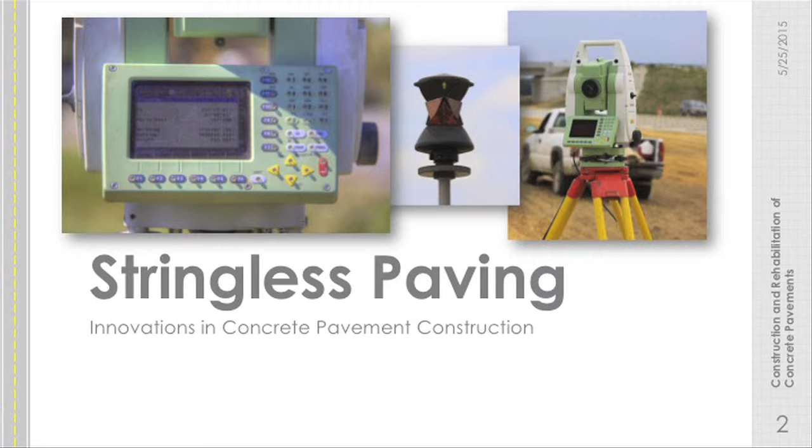Stringless paving. There's not been a lot in my decade in the industry that has really revolutionized things as much as this. It's changing the speed of construction. It's changing how the owners interact with the contractors. Because it used to be the case that the owners did everything behind the scenes and they would hand you a sheet of plans. The contractors had to decipher what that actually meant to then build things according to the designer's dream. Now, the owner does the design inside of a computer and then they give the contractor exactly what's going to be built. There's no more interpretation. It's more of a collaboration that's happening.

ACPA has a webinar on this topic of stringless paving as well. Again, that's another one that's free. Gives you a lot of the good information on this.

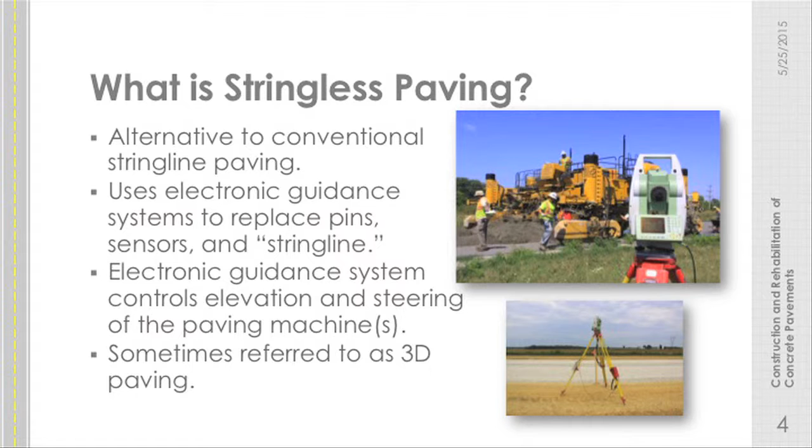So this is an alternative to our conventional stringline paving. We're using electronic guidance, things like GPS and lasers on site to replace the string lines. This does all of the steering and elevation control, every piece of it. So sometimes we refer to this as 3D paving.

There are a lot of benefits. It's much less labor intensive, reduces a lot of our prep time. The engineers that we have doing the surveying are harder and harder to find, so they cost more and more every year. This replaces them, not to make them redundant or obsolete, but there are still engineers and technicians necessary to work this equipment some.

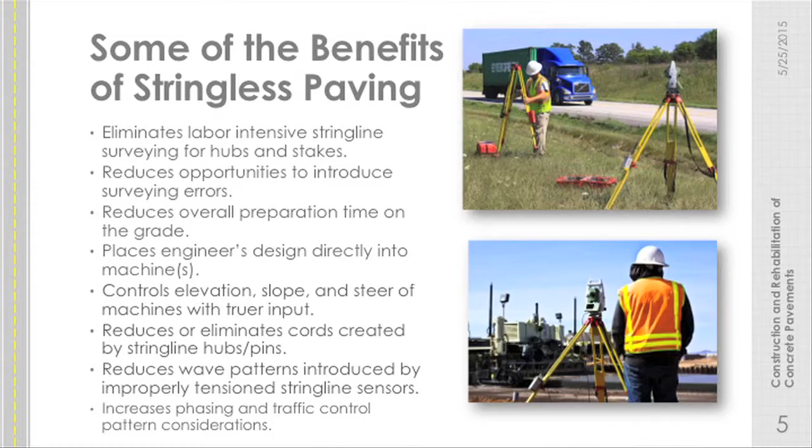But the engineer's design goes directly into the machines. There's less points of error possible because exactly what I drew in my CAD file is exactly what gets built. I don't have someone interpreting into a string line what that is and then have opportunities for errors from that point and then on to the paving equipment. So all of that work that I showed you earlier about the surveying and the hammering in of reference hubs and setting up the string line, all of that is gone.

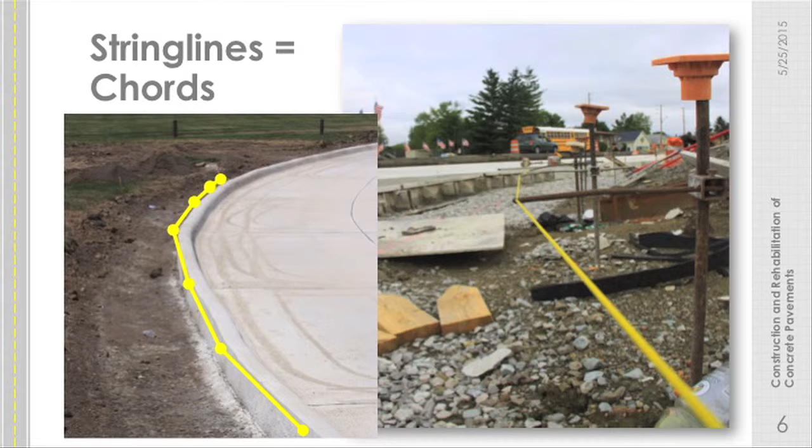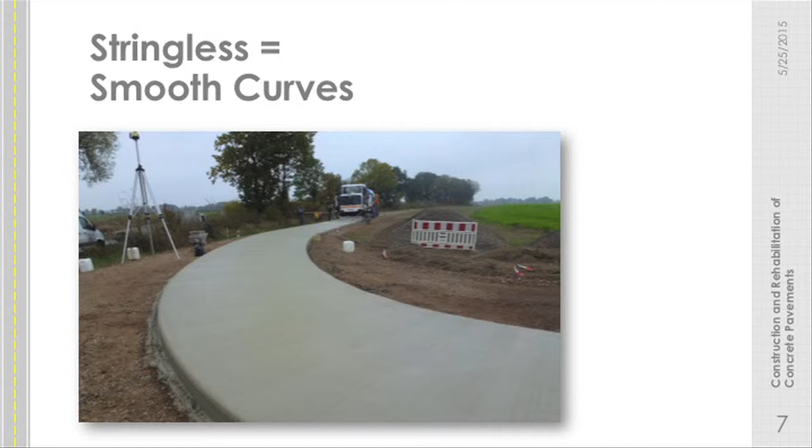Now, in conventional string lines, we have to have these straight chords or tangent sections as we go around curves. You can see that built into the side of the pavement. With stringless paving, it's perfectly smooth. It's the exact mathematical equation of that curve, both in the horizontal direction and vertically. So it's a much, much smoother end result.

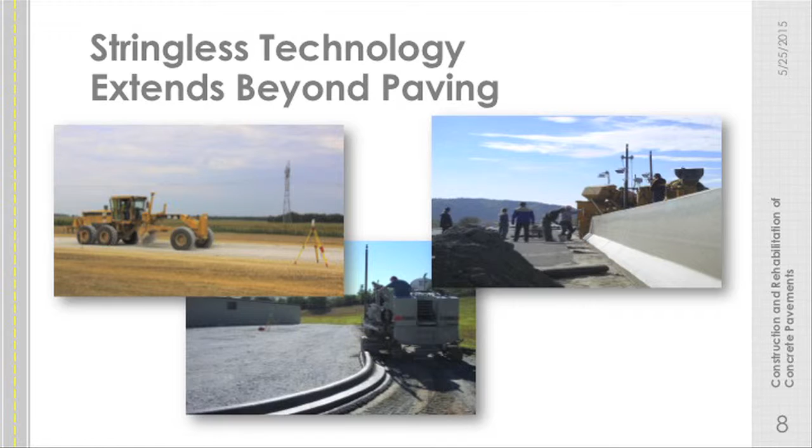Extends beyond paving. We use it for earthwork. We use it for barriers. We use it for curb and gutters. So any piece of roadway construction equipment at this point, we can use stringless paving on.

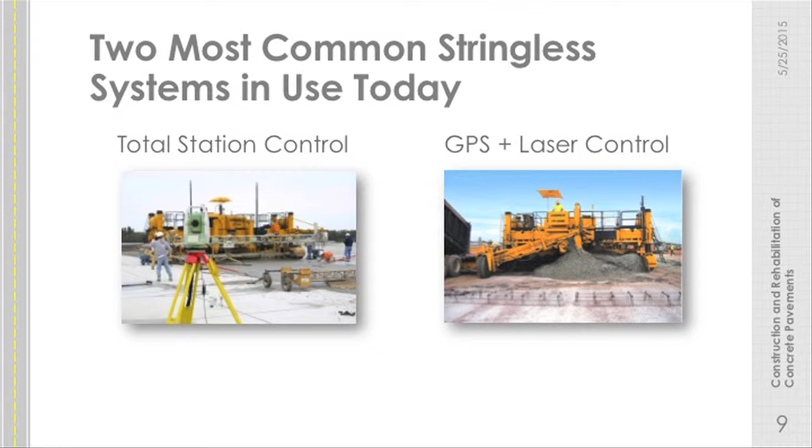Two most commonly used types, we're using total stations, robotic total stations. That's this piece of equipment you keep seeing. It's basically just a digital eye. Or we can use GPS and laser control. It's slightly less accurate. We use the GPS for X and Y, where we are on the Earth, but GPS isn't particularly good at telling you your elevation, not to the tolerance that we need for roadway building. So we have to augment that with lasers on the ground if we take that specific approach. But the total stations is the most common.

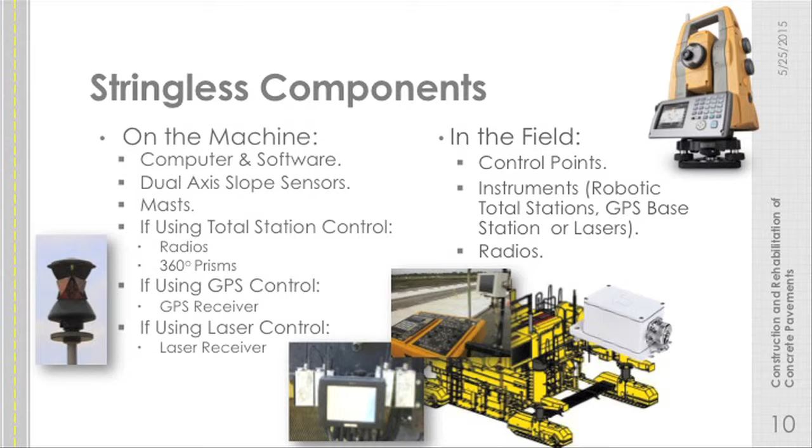So on the piece of equipment, we have a computer and software to run all of that. That's usually a small touchscreen panel placed right alongside the panel that the paving operator uses to control the vibrators and everything else. We have a dual axis slope sensor, which is just this little white box. It's no different than what you have in your cell phone that tells it, I'm tilting my phone this way or that. Same technology, just attached to a paver.

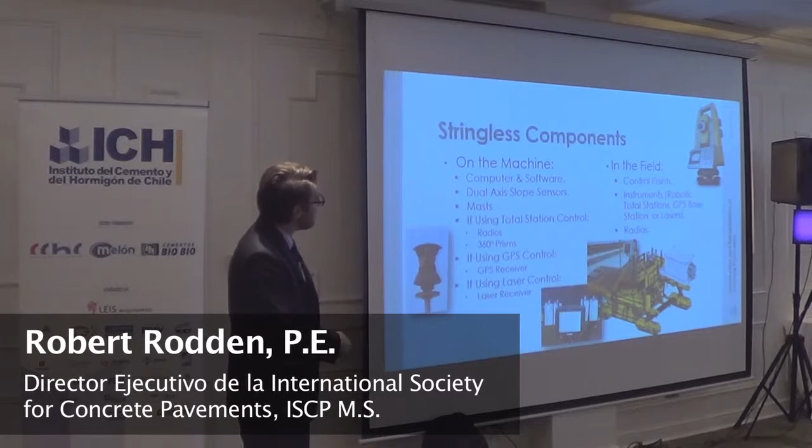We have masts, which are just poles sticking up into the air, that on top of them have these 360 prisms. And then we have radios, which talk back and forth to the computer. So that's these little devices you see here, the 4 of those behind that touchscreen computer.

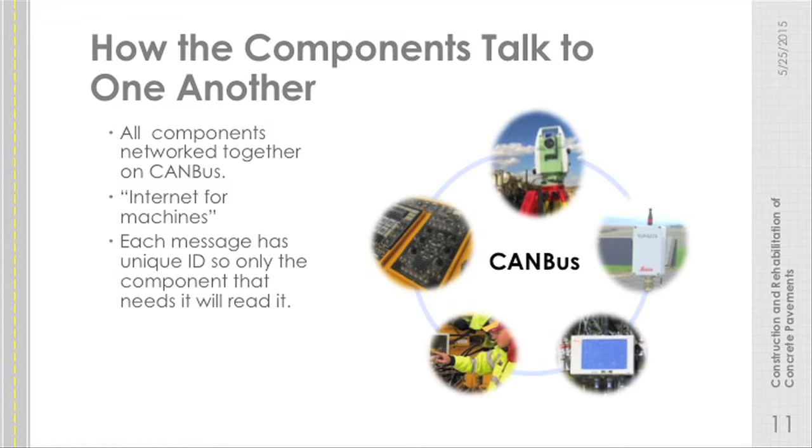Now in the field, we have our control points, those robotic total stations. And we have radios talking from that back to the paver. So there's this entire, basically, wireless internet system for these devices to talk to each other called CAN bus. And messages are just constantly being sent between the different components. We have our robotic total stations, which can sense where the paver is. That's all that they know. That's the eyeball pointing at the paver, telling it, I know where you are, which it radios that to the computer. The computer knows where it should be, because that's what has the model.

There is some human intervention possible, but the computer controls what the paver does. And it talks back to the eyeballs to see if what it did was right or not, and if it needs to correct what it's doing.

So here's that in more of a schematic approach. Just as with stringline setup, we start with those benchmarks, those places on the earth that we know exactly where it is. Those are usually developed by your local government. From there, we do have to use some surveying to control the exact location of our control points, which are just prisms, so we know exactly where that prism is in space.

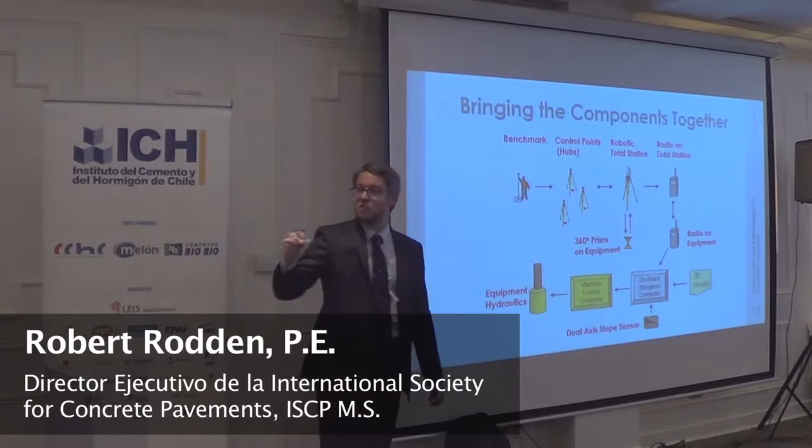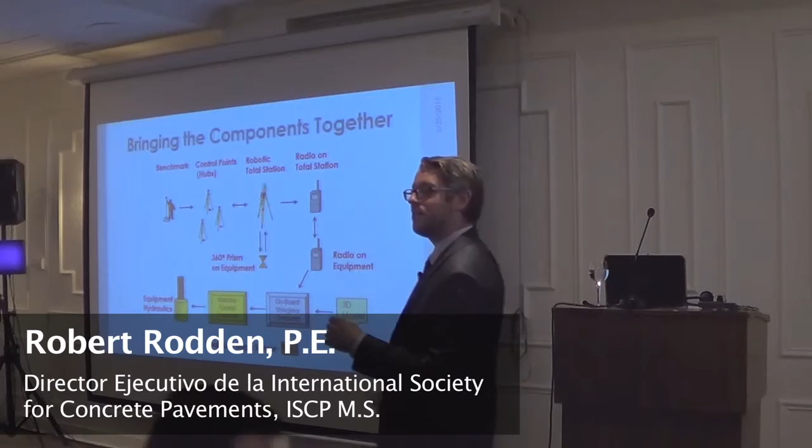So our robotic total stations really do a lot of the work. That eyeball talks to the prisms, 3 of those, to triangulate its position. So it doesn't matter where you set up this total station. You have 3 reference hubs, 3 control points. You just bring this total station out, set it up, it rotates around, and it can tell you exactly where it is. So we have a couple of those.

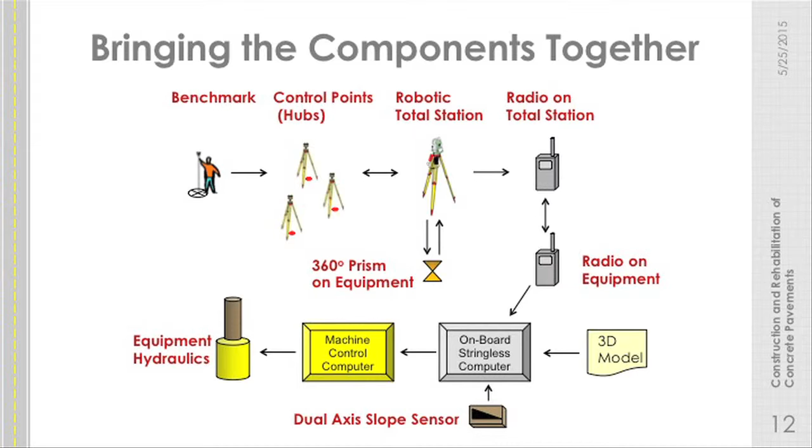Through the radios, it talks to the onboard stringless computer, the piece of equipment on the paver. That tells it where it should be, based on the 3D model, which we've already input directly from the owner. So we have the last component, those dual-axis slope sensors, telling us the X, Y, and Z of the paver.

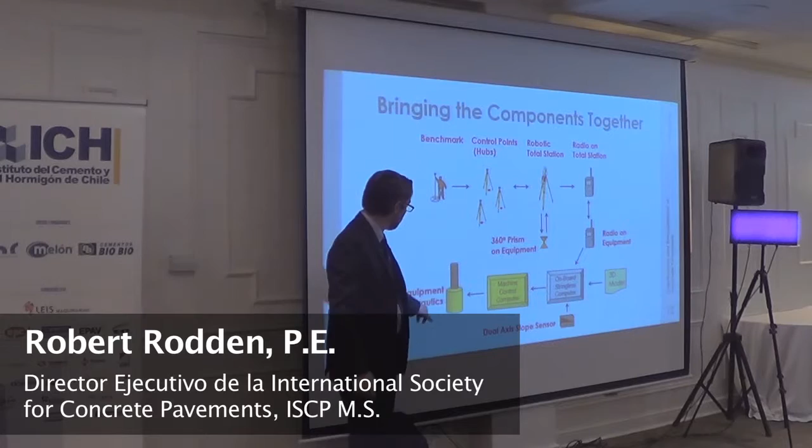In the end, the machine control adjusts how the paver is angled, how it's rotated, all these different directions that it can go through its hydraulic movements that were normally controlled by the string lines. It's all done now by that onboard computer.

And it's interesting to see this in action. The contractors, when they first get introduced to it, are very hesitant that they can just not touch things and it will magically go where it needs to go, but it really does work.

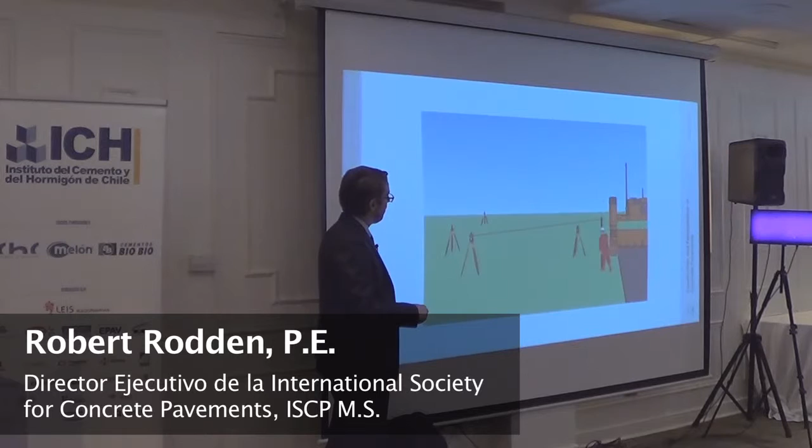This is an illustration of the process. So we've got our slip-form paver. Our masts here have prisms on top, so that's how we figure out where it is in space. Our total stations, we have a couple of those around the slip-form paver, are referencing these control hubs, which we set using surveying. We have one total station telling us the as-built constructed thickness with a rover.

So we have 2 total stations pointed at those masts, a constant feedback loop, so the paver knows where it's going. If it starts to go the wrong way, the total stations will talk to it and say, fix what you're doing.

The problem becomes that we have a limited range, about 100 meters. So once we get far enough away, we have to leapfrog, changing the control from one of the further away points to a new point.

As we're progressing constantly, that one operator, one person here, is continually moving the total stations forward and controlling the entire process. Just one person.

So all of that labor that we had in stringline setup and everything else, now the model goes directly into the paver, and one individual moves around to make sure that the paver can talk to the model.

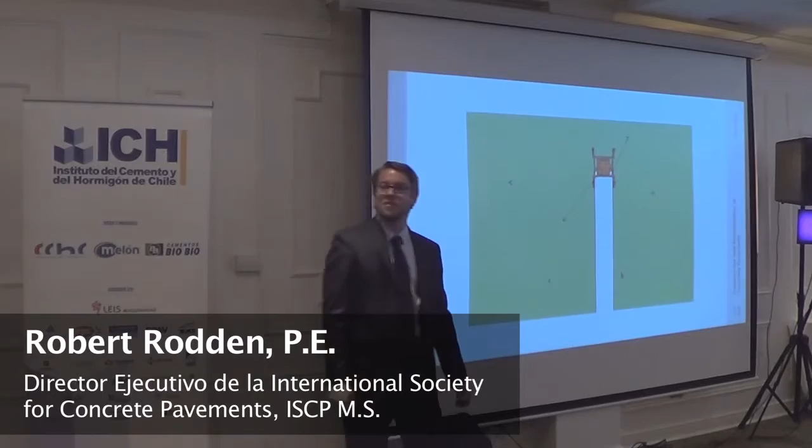So we got too far away from that one. The rover had to move the one that it was using for as-built thickness forward, go grab that one, and now bring it around. That's how paving continues. It's always referencing 3 points on the ground—sorry, 2 points on the ground.

Now there's been a lot of practical components to getting everything correctly. The masts, for example, it was originally recommended to have one in the back and one in the front. But as we go into turns, we found that we got a lot more crossover issues, and having both of the masts at the back, directly over what is being slip-formed, gives us the best indication of exactly what we're building.

Because otherwise we had to translate that distance to the front of the paver into the models.

So that's a short introduction to stringless paving. It's really cool technology. It did not start in paving—it started in earthworks, and it's found its way into paving operations as the accuracy of it has improved over time.

So some equipment advancements. We have progressed very quickly.

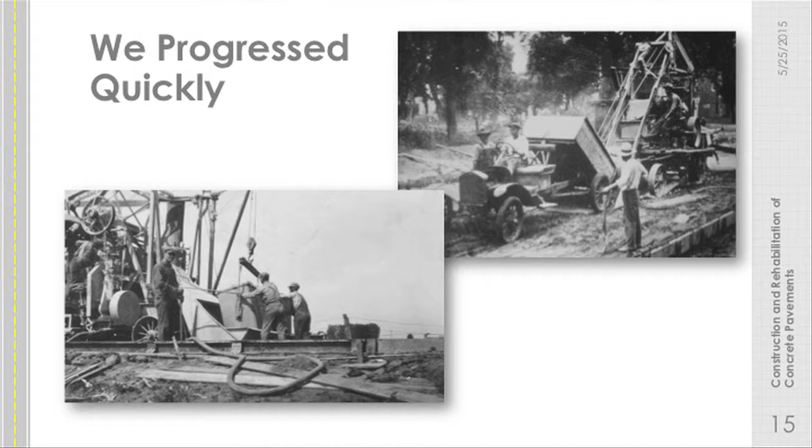In the initial days of roadway construction, early 1900s and before, we did not have trucks. We had to actually build rails to build roads. So we would build a railway that allowed us to transport the materials to build the road, and then we'd build the road. Prior to that, you would see wagon wheels and a lot more labor-intensive methods, but to get production, we actually built railroads to build roads.

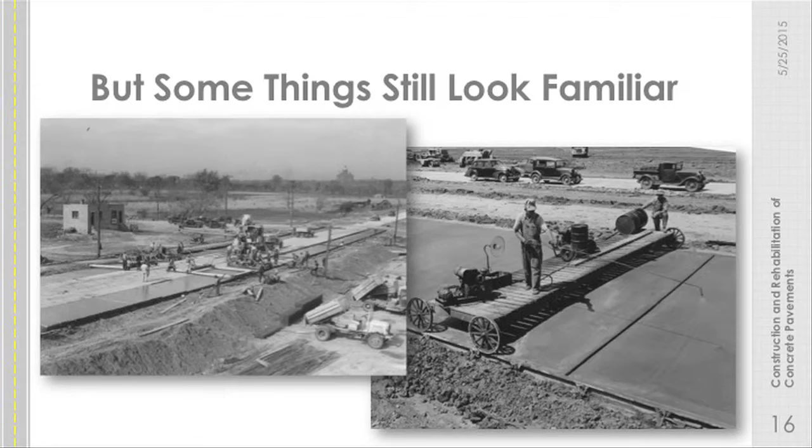Some things do still look familiar, though. These are some pretty early photographs. We have a bridge, we have someone applying curing compound, and we have a different joint built into this here. That's probably a redwood expansion joint. We don't use those anymore, but things start to look familiar.

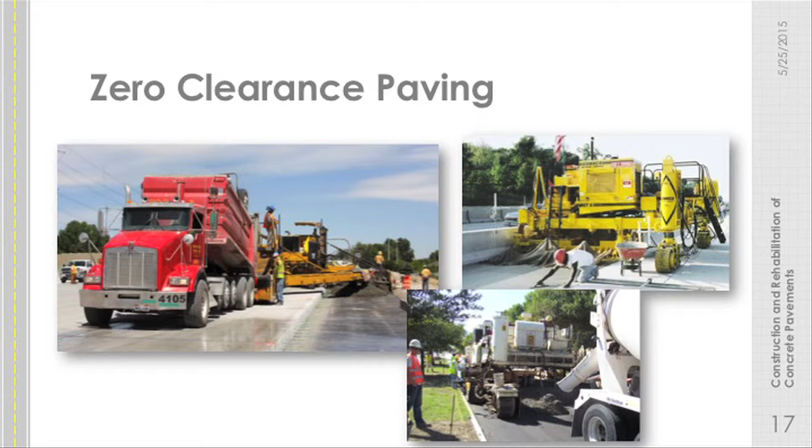Some of the recent advancements that we've had: zero clearance paving. They're right up against that Jersey barrier. The way that's accomplished is we have our two tracks on this side. There's no track in the back left, we have a track in front of the paving, and this back left corner is essentially cantilevered out so that we can pave right up against that barrier.

Here's a photo from the front in the bottom right where we're paving right up against this edge, and you can see the track has been moved to be in front of where we're depositing the concrete even. So we can make these adjustments based on clearance limitations. In this case, the entire paving kit - so we have the paver over here on the left, really, but the vibrators and the pan and everything else are just cantilevered out.

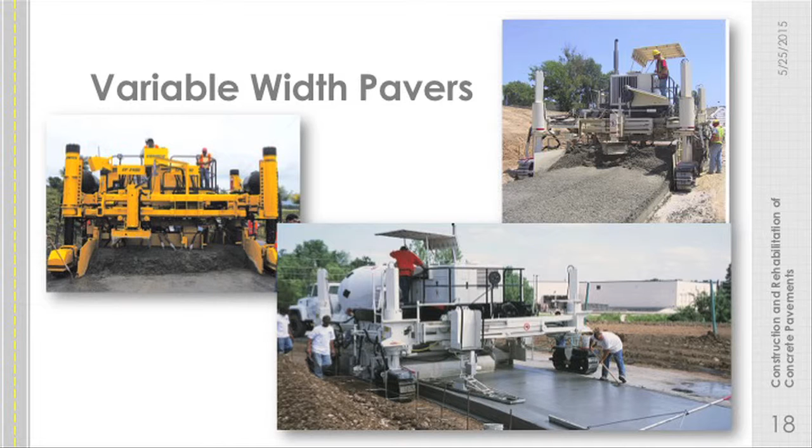We're now seeing variable width pavers. What these allow us to do is reduce the time of adjustments of width. Traditionally, if you were to change the width of a piece of slip-forming paving equipment, it might be a day or 2 or even 3 to accomplish that, because what happens is they have to adjust the entire width of the frame. It's a very rigid piece of equipment, so they would have to separate it, add in sections, and then pin it all back together.

Now we basically have telescoping frames. So as we're moving forward, if the pavement gets wider, the paver can just adjust for it. So it's a third dimension - we're not just placing uniform strips anymore. We can change the width on the fly. Only through 3D paving models has that really been a very smooth transition. To accomplish that with string lines, you have to have a string line on both sides, and the surveying becomes a little more complicated. So we're seeing these now from all the major paving manufacturers.

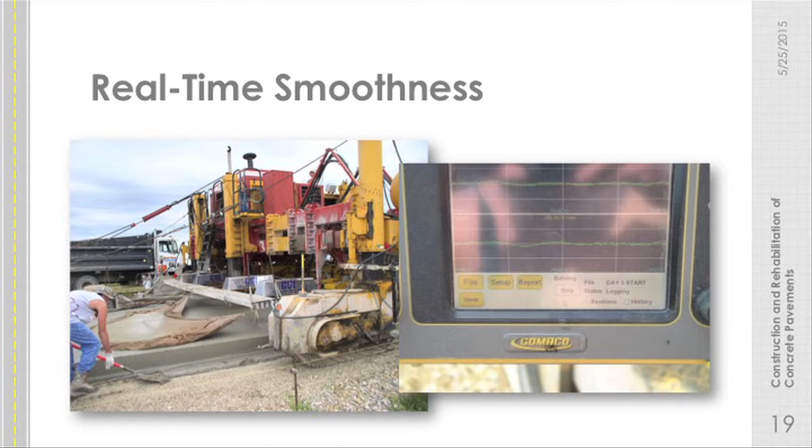Real-time smoothness. We saw the photo on the left before. This is a readout of what that looks like from the Gomaco version. In real time, they are seeing the International Roughness Index, the metric of smoothness that they're being held accountable for. So from the contractor's perspective, if the owner is not happy with how smooth it is, all they have to do is give them the printout to say, this is what I built. If somehow there's more curvature of the slabs and it's rougher than you want, maybe it was the materials or your specifications or something else that caused that to happen. But this is how smooth I built it.

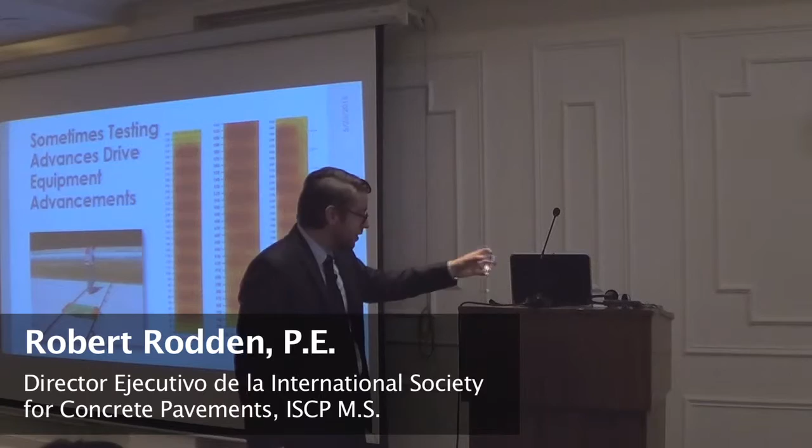Now, you don't have dowel bars here, but you might still find this interesting. We have this device, very similar to that magnetic imaging device for thickness estimation, but this we use to image dowel bars. We place a plastic set of rails - there's no metal at all inside these rails, even the screws are plastic. The person operating this device cannot have steel-toed shoes. You cannot have a truck parked near this, because it's that sensitive to any sort of metal near it. So we place these plastic rails and drag this suitcase-looking device over the top of the rails, and it gives us a readout of exactly where all of the dowel bars are and how misaligned they are in every direction. So we can use this to see, in this case, the basket's separated and the dowels have fallen like that - we see the back ends that are affixed to the basket. In the case all the way on the right, it looks like the basket just got pushed and skewed.

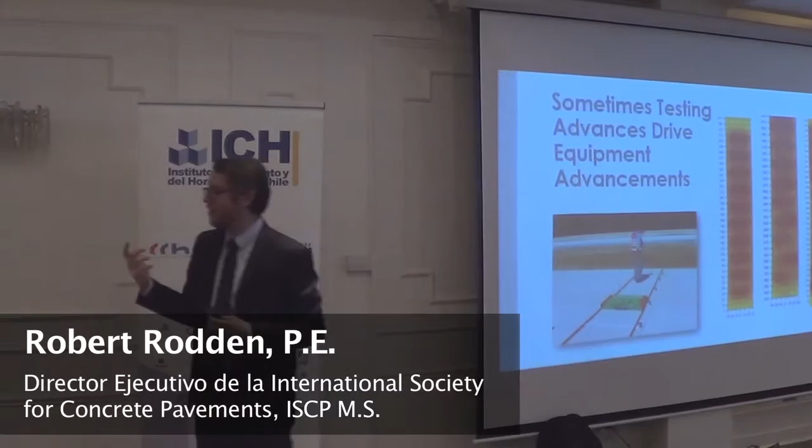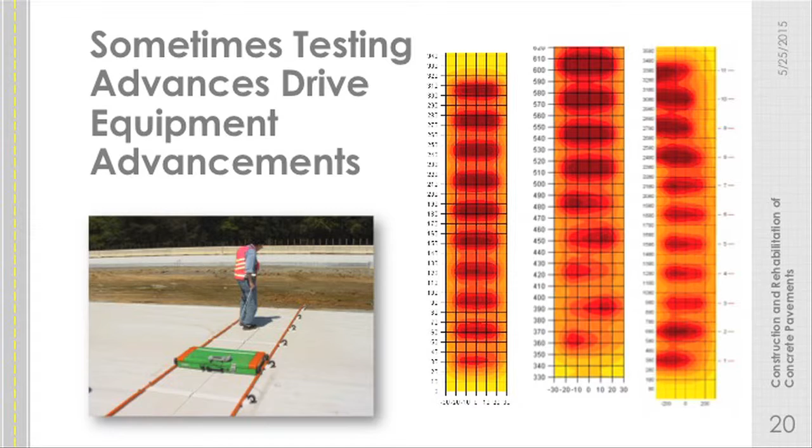Now, we don't have widespread problems from dowel bar misalignment, so this is a solution looking for a problem in many respects. In the US, we found that all of the state agencies are now all of a sudden concerned with their dowel bar misalignment, even though we've never had a problem. There's no tie between performance and dowel misalignment, and there's been research into that. But we can now test it, so we are testing it all over the place. It's a relatively quick procedure, but it's very, very accurate. It only works on round dowels, though, so far.

The future of construction - just some of my personal opinions about where I think things will go.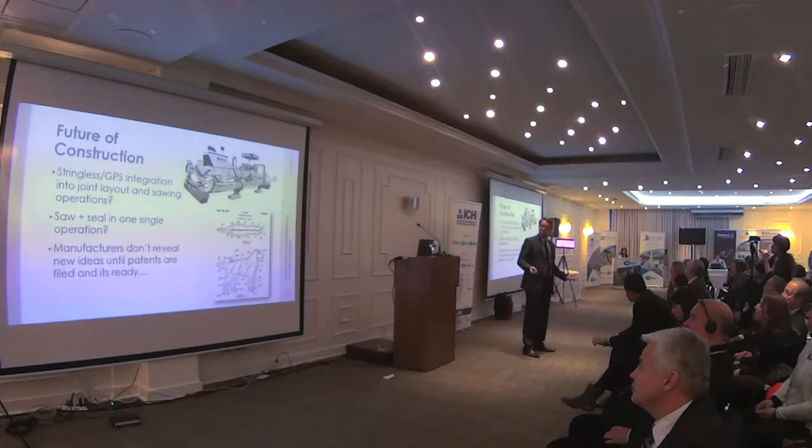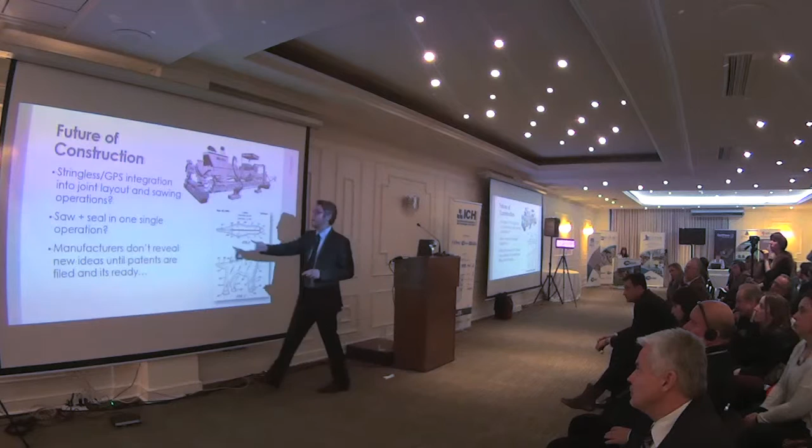We'll probably see stringless GPS integration into joint layout and sawing operations. What I mean is, in the next 5 or 10 years, we will be able to go out into the field and, using the same equipment we use for stringless paving, identify exactly where the corners of a drainage inlet are, where the corners of a manhole are, and exactly where the edges of the pavement will be. Then feed that into a model in something like a BIM system.

An integrated management system could have the joint layout automatically take care of itself. Not only that, but then have the saws all be GPS guided, so the operator doesn't have to do anything other than bring the saw into the field, step back, and watch it go and cut joints. I don't think we're as far away from that as you might imagine, and it will get rid of a lot of the question in the contracting element, because any contractor outfitted with the same equipment will build the exact same joint layout based on exactly what's in the field.

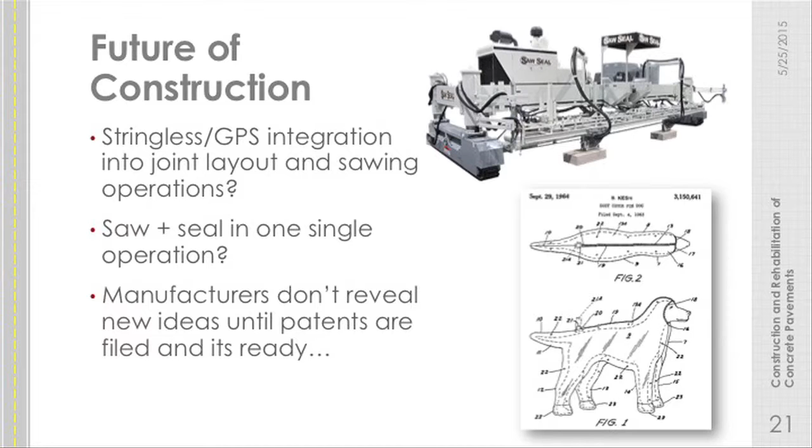This device in the top right does sawing and sealing in one piece of equipment. It will cut all your longitudinal joints and your transverse joints and do the sealing all in one piece of equipment. Right now that's a lot more people being put to work, but we're trying to automate things to that degree to get high production, especially on these thin overlays where we're paving very, very quickly.

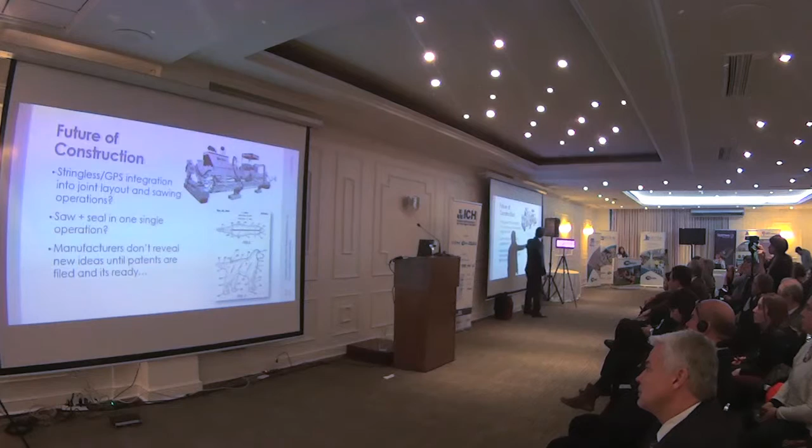In the end, though, I really don't know what we're going to see. The manufacturers don't reveal new ideas until all the patents are filed and ready. Just for the interest of comedy, I have my favorite patent that I've ever come across.

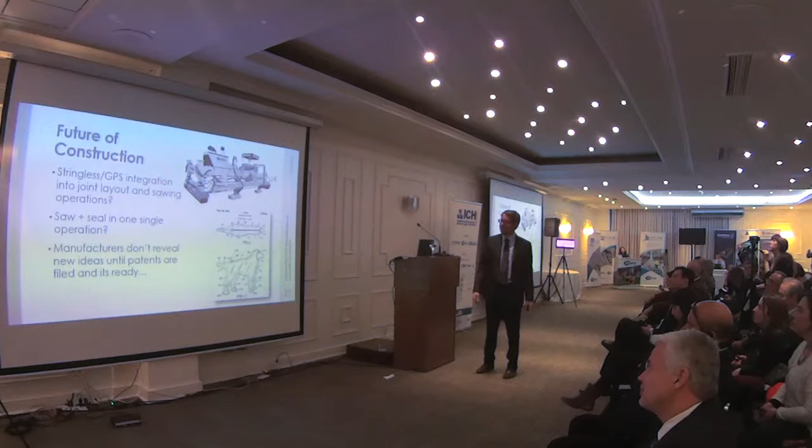It is a dust cover for your dog. You can patent pretty much anything, and people do.

So the economics of pavements, in the final stretch: life cycle cost analysis, or LCCA. There are 4 decision points from my perspective in pavement type selection. Historically, initial cost has been it, that's the only decision point. Now we're having a dialogue about other things.

In the modern era, we're talking about cost, that's still the biggest piece. We're talking about the user experience, so how smooth the ride is, if it's objectionable in any manner, if it's causing damage to people's vehicles as they pass. Safety of the ride is increasingly important. And lastly, probably too big a topic, I was joking about this during one of the breaks, sustainability.

We keep talking about sustainability, but no one is making decisions based on it. I don't care where you are in the infrastructure space, it's part of the dialogue, it's part of the research, but no one's saying, yes, we absolutely did that because it was more sustainable than the other, even though it cost a lot more. It just is not happening. So sustainability is on our radar, but it's not really driving the decisions. Cost is still king, that's the number one decision point.

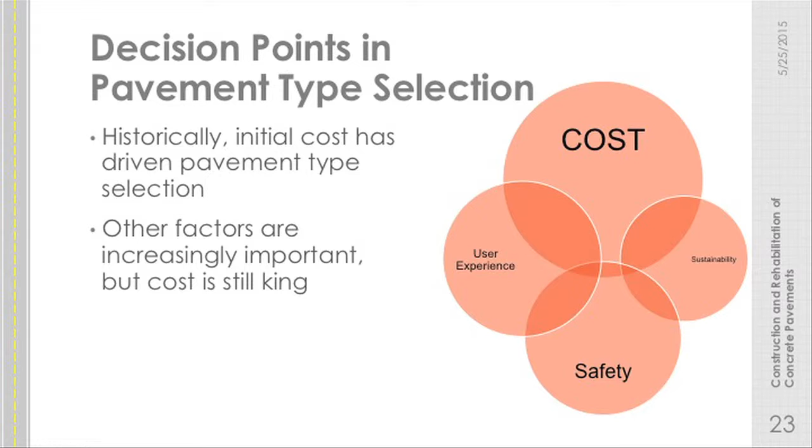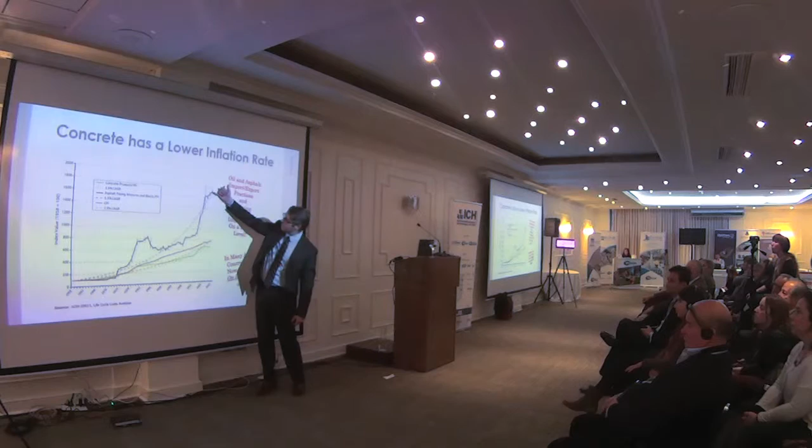Now, we are fortunate in that the discussion of life cycle cost has become more and more common. So a couple notes on things: concrete has a lower inflation rate. Now, this is from the US, I don't know how true it translates to Chilean prices, but this is our producer price index for asphalt in the black line, and concrete in the green line. And the red line is consumer price index, CPI, which in the US is our metric of inflation.

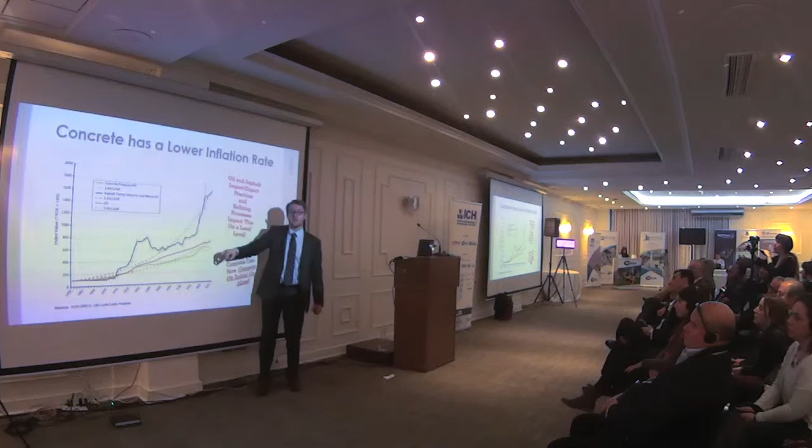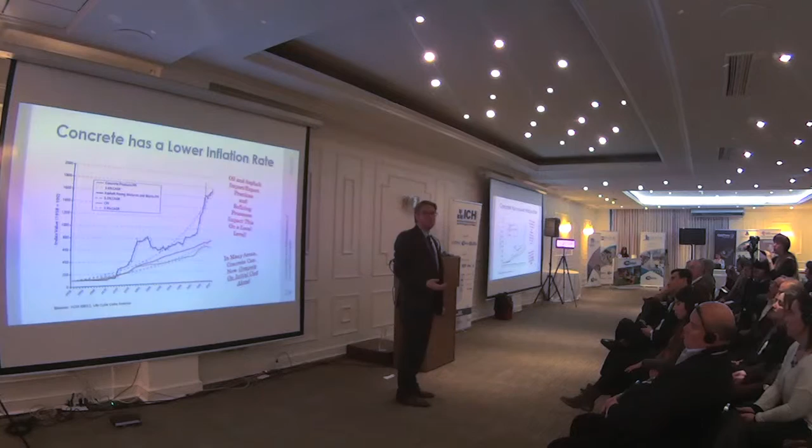So from the 1950s up to the 2010s, over that time, the dashed line you see is a 3.9% compound annual growth rate, CAGR. So 3.9% per year, about 4%. That's how much inflation has been in the US over that long of a period. That's the number you'll most commonly see referenced.

Now, if you look, the concrete products producer price index has inflated at a rate even lower than that. If you were going to invest in anything, you would have been better investing in a broad index of inflation than in concrete in the United States. So cement producers aren't as well off as they might think from that perspective. But we see that, while there have been increases year over year and across time, there's not too much variability, no massive jumps in concrete prices. It's relatively stable.

Asphalt prices, on the other hand, because of oil embargoes, supply and demand issues, and other challenges, have been much more volatile and increased at a much higher degree than concrete. In fact, over that time frame, we're looking at about a 5.5% compound annual growth rate. That has changed the competition between concrete and asphalt in the US to a very large degree.

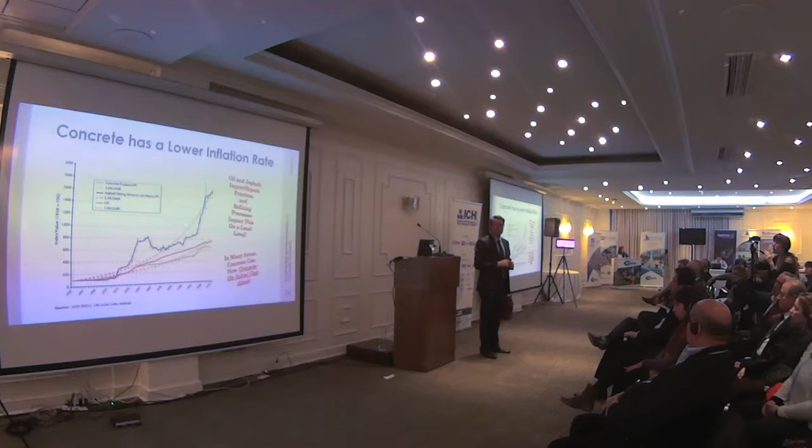Now, this is just pricing. There's a lot more to this challenge. Talking about this perspective of the marketplace in Zimbabwe two weeks ago, their challenge is worlds different than it probably is in Chile, and it definitely is in the US. There, they don't have hot mix asphalt. They get the emulsion asphalt that South Africa doesn't want. They have none of their own refineries, so everything they pave with is imported, and it's of a very poor quality that gets them between 5 and 10 years max of performance. And they're paying about a 40% premium over what the exact same bitumen goes for in South Africa.

So I'm not trying to suggest that what's happening in the US is suggestive of the entire world. I'm asking you to locally have a discussion about these sort of factors because they are important. The import-export practices and the refining process can have a huge impact on things.

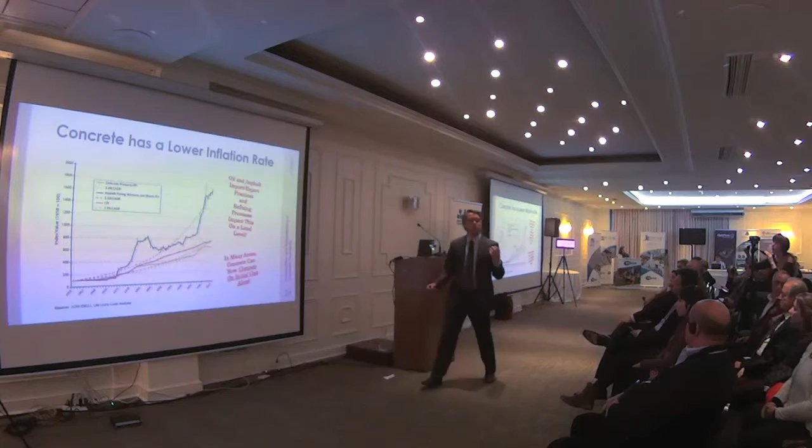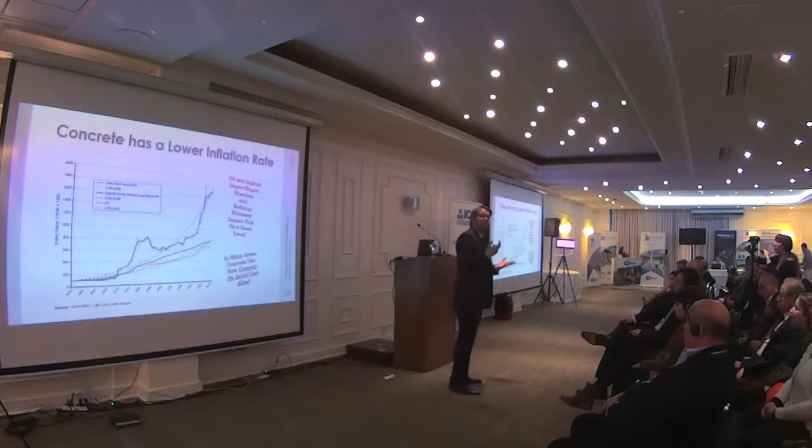In the US, because of the price of other materials like jet fuel, diesel fuel, and gasoline got to be so high, the refineries installed devices called cokers. What these cokers do is take the long hydrocarbon chain that is asphalt and break it into very small parts, which become diesel fuel, jet fuel, and other higher yield, higher margin products for them as refiners.

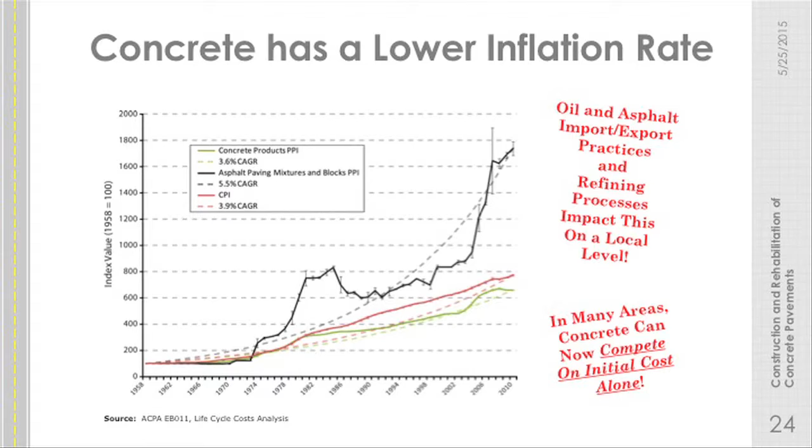Now, it used to be the case that we would have enough asphalt to meet our demand after all of this other refining process. But the economics of the refining process themselves in many parts of the world have changed because of the price of the other components. Asphalt, while it used to be a byproduct, is now very much a commodity. It's part of the pricing structure to maximize margins for refiners. That's only happened very recently in history, and globally we don't yet know the consequences of that anywhere, I don't think. But this is impacting things on a local level.

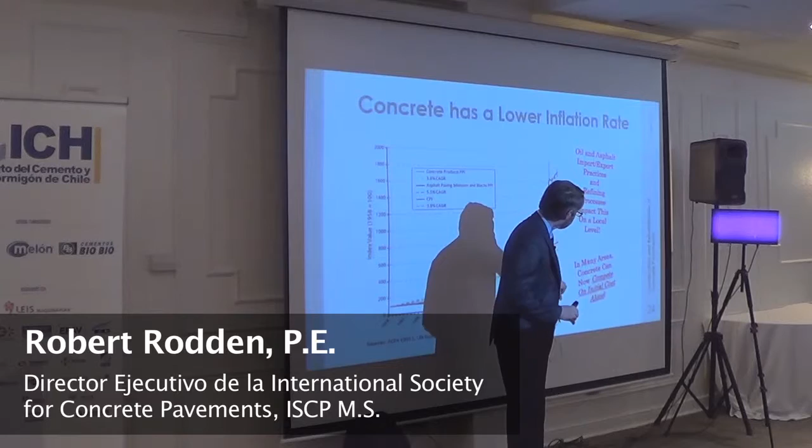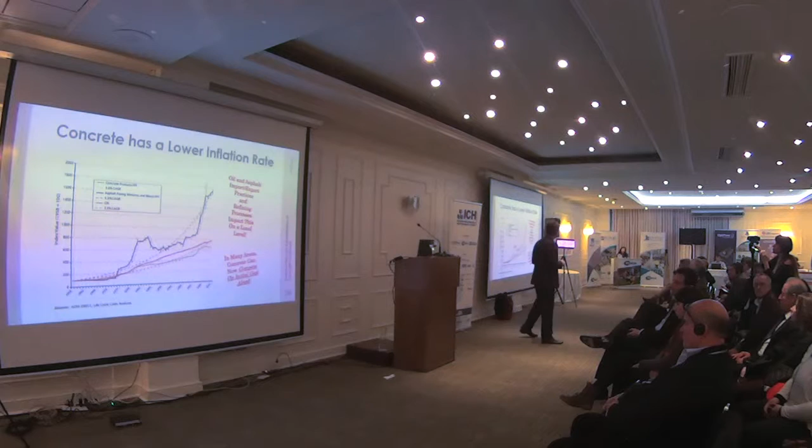The point being, in the US, because of the things that have happened in recent times, concrete now competes on initial cost alone. We don't even have to have the discussion we're about to have on life cycle costs. Because of this massive increase in asphalt prices in the last 5 and 10 years, for a comparable design, initial cost alone in many areas of the US, concrete can be lower than asphalt. And it's a service life that's twice as much.

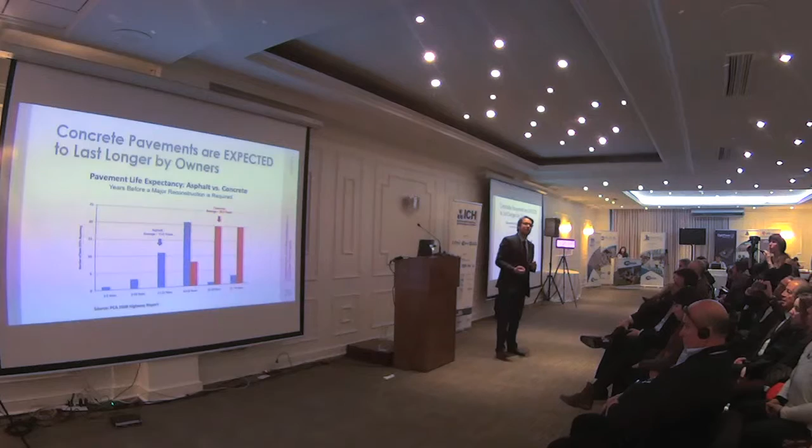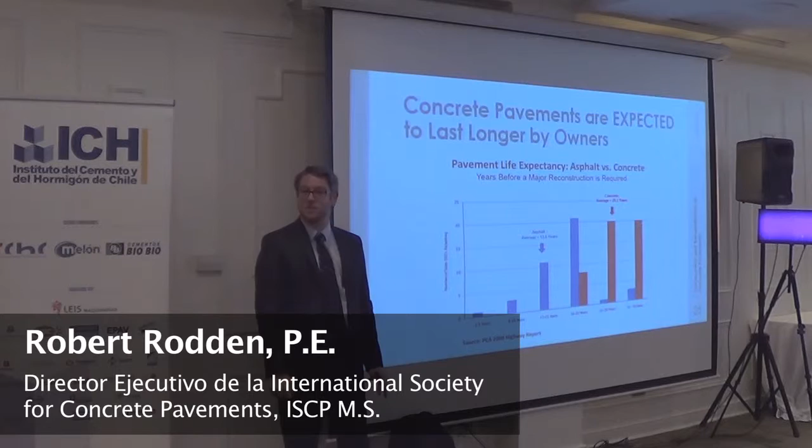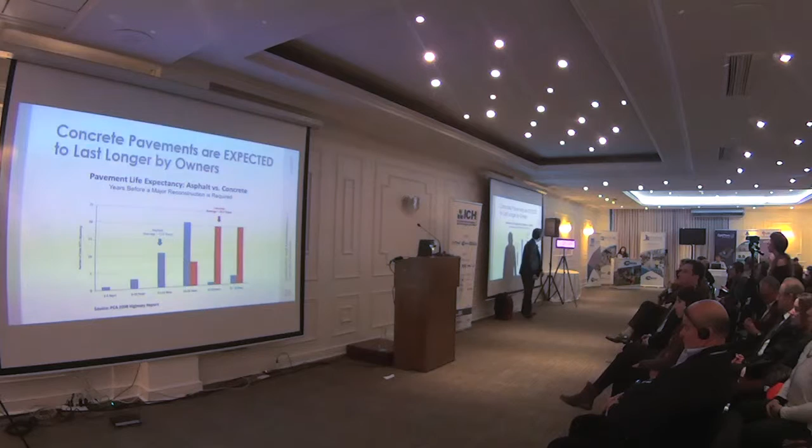So here's the plot that I said we would get to. This is based on a survey of state agencies in the US about their expectation of how long their pavements will last. Asphalt is in blue. We have at least one state that says 1 to 5 years, that's all they expect for their asphalt. Some are 6 to 10, 11 to 15, 16 to 20. The average is 13.6 years. For concrete, their expectations are quite a bit higher, on average 29 years, over twice as long. And it costs just as much right now.

So it's become very much a no-brainer, as long as the state agency is willing to accept that the world around them has changed. But we still do talk about life cycle cost. This is a real-world example. It seems exaggerated, but it is not.

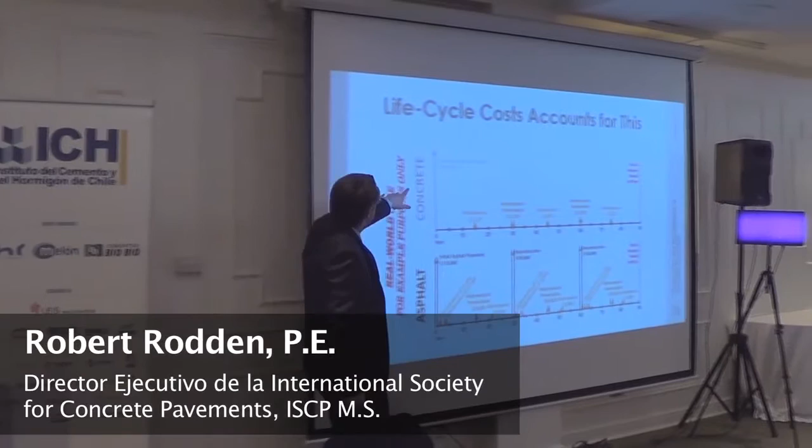This is from a local residential street in Wisconsin. They had records of performance and costs for their concrete and asphalt pavements locally. This is their real expense diagram, where the height of the arrow indicates cost, and the point in time indicates when it occurs. This is an area where they had 100-year-old concrete pavements that had performed beautifully. They had no concern about building a new concrete section, say for $374,000, that will last 90 years with some maintenance and preservation along the way, but not too costly—mostly slab replacements, sealing, things like that.

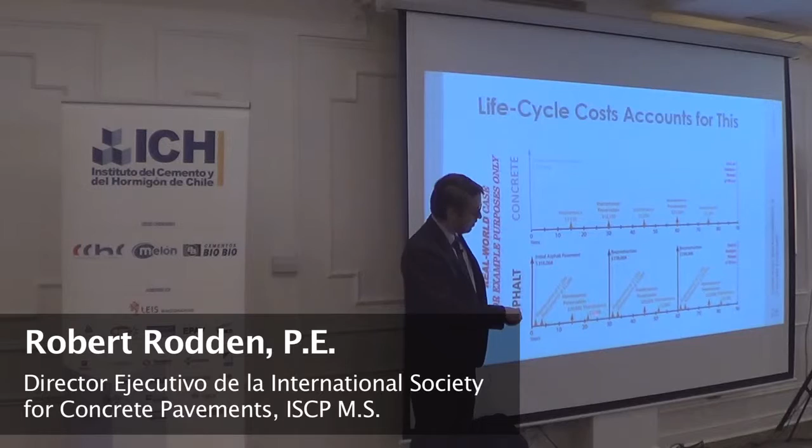Their asphalt alternate was about 20% cheaper in initial cost, and its maintenance wasn't any worse over 30 years, but it only lasts 30 years. After 30 years, they had to reconstruct that section, with the same maintenance cycle, and then had to reconstruct it again. So over time, while the asphalt section was cheaper up front by 20%, it ended up costing them a lot more. So they went with concrete in this particular case.

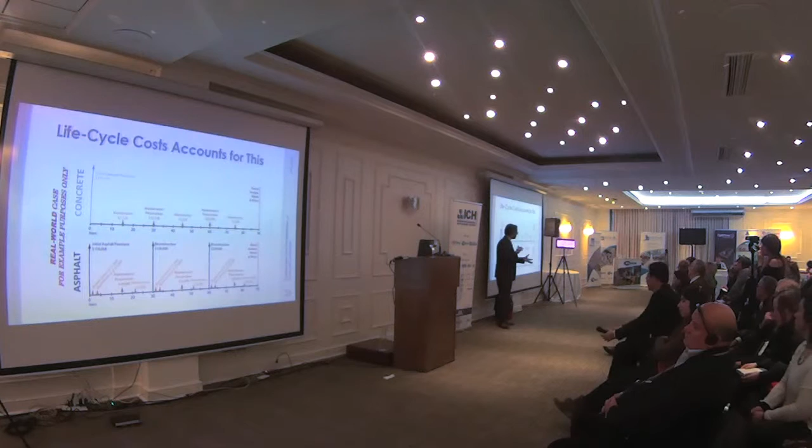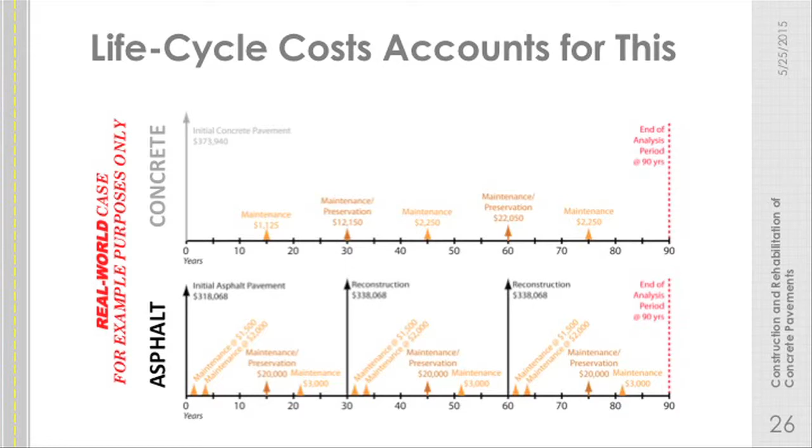Wisconsin is one of those states that has, in some areas, very recently made this transition. The city of Milwaukee, for example, was doing alternate bidding for about 3 years, and concrete won all of the projects on initial cost. So they no longer build asphalt pavements in the city of Milwaukee. Everything that is new is concrete, because they've recognized the sections they have lasted so long. Why should they build with an inferior product if it's going to cost them more?

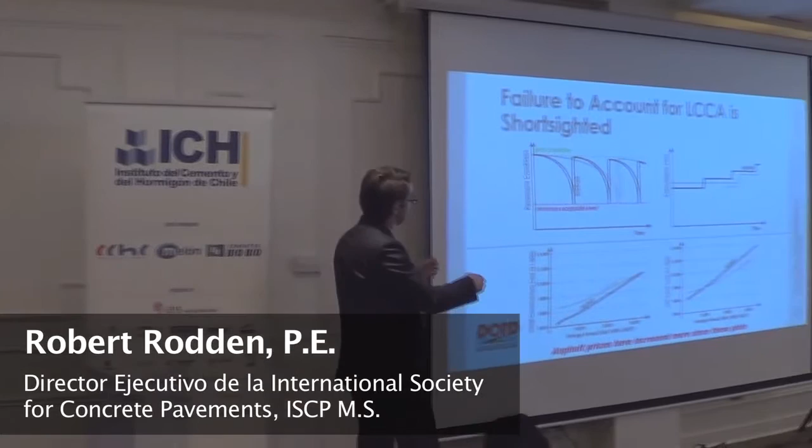Now, failure to account for LCCA is short-sighted. If we're looking at our pavement condition over time, and we start with great condition for either pavement type, and we have some minimum acceptable level, the concrete pavement will just take longer to get to that minimum acceptable level. We'll do some sort of preservation, and it will continue. The asphalt pavement just has a shorter cycle.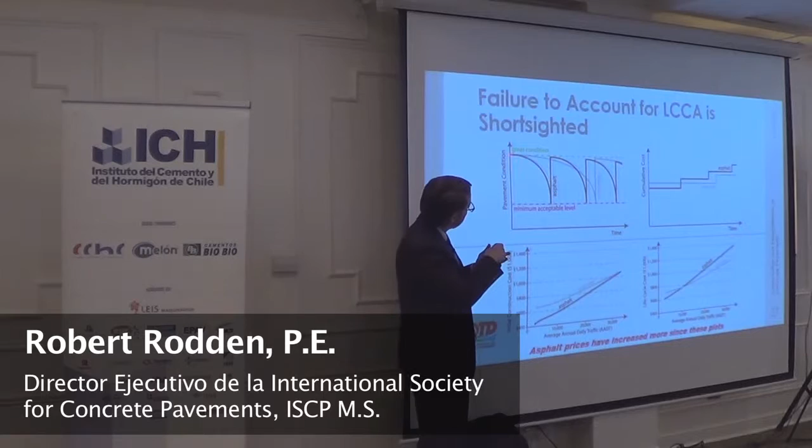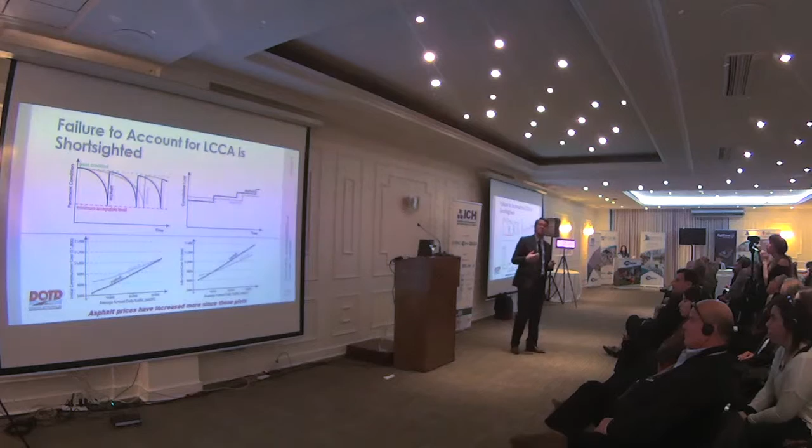They're working on extending that in many regards, but I don't know anyone that will argue that the cycle is longer. So if we look at the cumulative cost, well, the asphalt might be less costly in the beginning. As soon as we have one of these activities, an overlay or sealing of the surface or sealing of cracks, it costs us money. And those costs add up over time. And that's all that life cycle cost analysis is trying to track and predict to help us make better decisions up front.

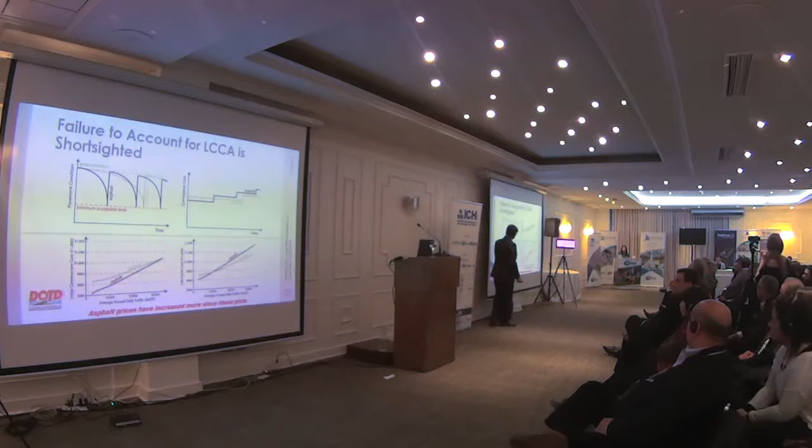Here's a real-world example from the Louisiana Department of Transportation. They wanted to track what the impact on their decision-making was based on considering life cycle cost analysis. What they did was looked at actual bids based on the daily traffic of the roadway. The initial construction costs were such that it took about 35 or 40,000 vehicles per day before the concrete and asphalt alternates were even, were similar to each other.

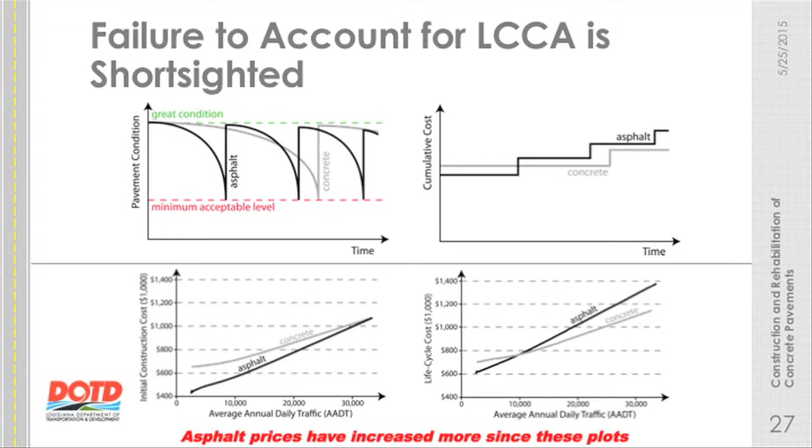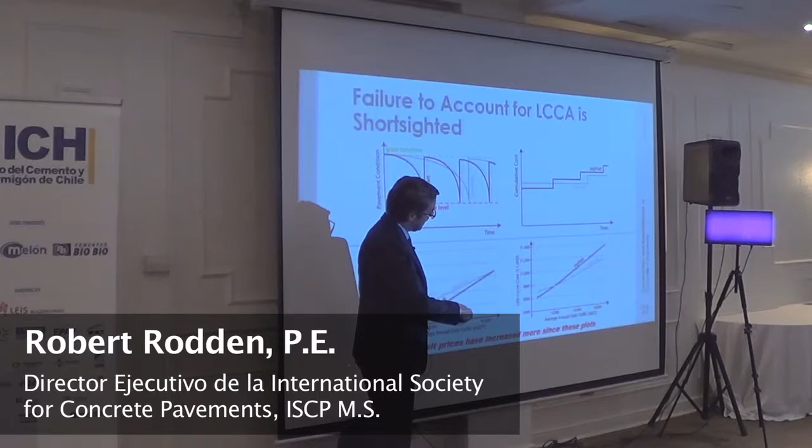Before that, at any lower traffic, the initial cost of the asphalt would be less than that of the concrete. Now, when they looked at the life cycle cost, they found that break-even point to be closer to 10,000 vehicles per day. And this was before that massive spike in asphalt prices that they did that study. The break-even point has to be further to the left there at this point in time.

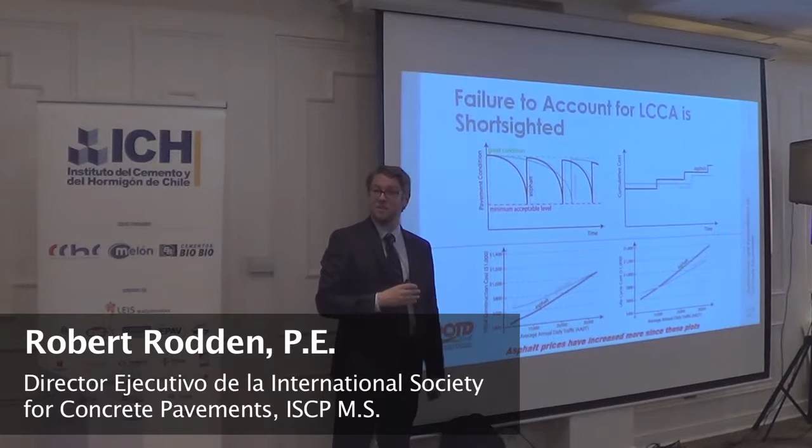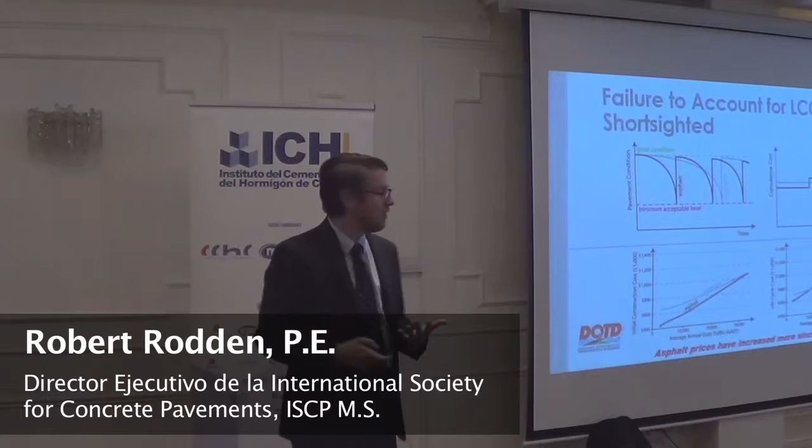Now, I'm not suggesting that if you're not comfortable with concrete pavements, you do everything in concrete pavements. I'm suggesting that this idea, this approach of alternate bidding, is the only way by which we can account for things and start to consider these particular details, and more importantly, to bring competition to the market.

So most of those images you just saw are available in this life cycle cost analysis guide that ICH translated last year. Talk to Mauricio, that's readily available. I think that ACPA is intending to distribute that through FICEM very soon as well.

So what this competition idea boils down to is that it's in the best interest of the owners, and the taxpayers especially, to consider these sort of competitive approaches to bidding. Now, there is a very complex relationship. There's been a lot of research in this area about the number of bidders, the volume of the market, the unit price, all these sort of factors that are all changing at once.

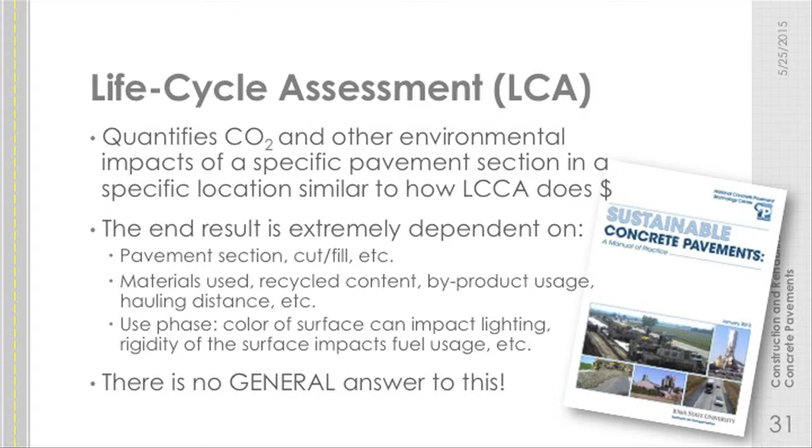But in any of these topics, the industries are just butting heads. I don't know that there's any clear answer. It is very project specific.

Another one of the CP Tech Center's documents is on sustainable concrete pavements, a manual of practice. That's not intended to compare asphalt to concrete very much. It's more there to provide guidance on how to build and design more sustainable concrete pavements, to raise our own bar rather than comparing things, to make our product better. But there's no general answer.

With that, are there any questions on innovations, LCCA, LCA, any of these other topics?